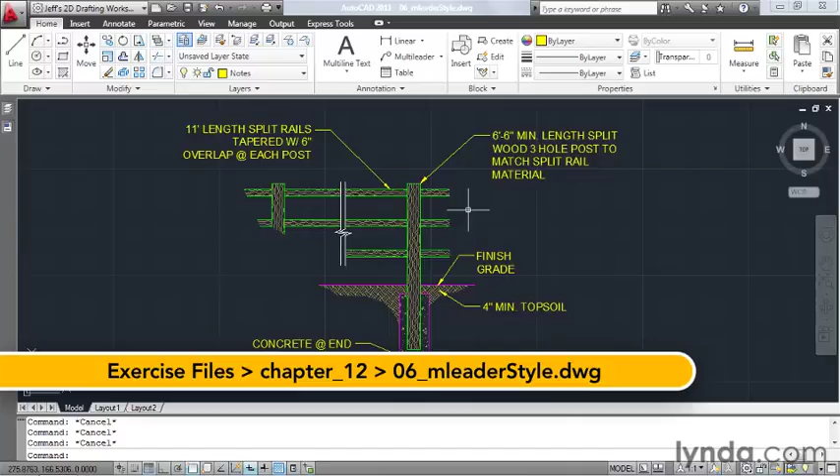You were probably wondering, and you were right, the appearance of your multileaders is also controlled by a style. In this lesson, we're going to take a look at multileader styles. On my screen, I have a detailed drawing, and this drawing contains several multileaders. Let me mention that all of the leaders in this drawing were created using the default standard multileader style.

Let's take a look. I'm going to click to open up the annotation panel, and right here, I can see the name of the current multileader style. It's called standard. All drawings start with a standard multileader style. Just like text and dimensions, you need to have at least one style to create multileaders. If I click this flyout, we can see that standard is the only style in this drawing.

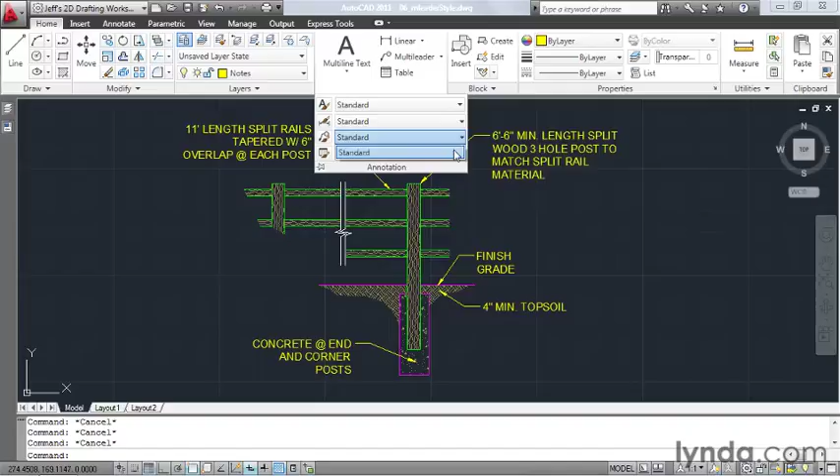If I'd like to make changes to this style or create a new multileader style, I'll click the multileader style icon. This brings up the multileader style manager. And notice this looks very similar to the dimension style manager. In fact, it works the exact same way. Right here, I can see the name of the current style. On the left side, I can see a listing of all of the multileader styles that have been defined in this drawing.

Using these buttons on the right, I can set a style current, I can create a new style, I can modify an existing style, and I can delete a style. Notice that the delete button is grayed out right now. That's because I only have one multileader style in my drawing. Now, since I have already created several multileaders in this file, I'm not going to create a new style right now. Instead, we'll make changes to the existing one.

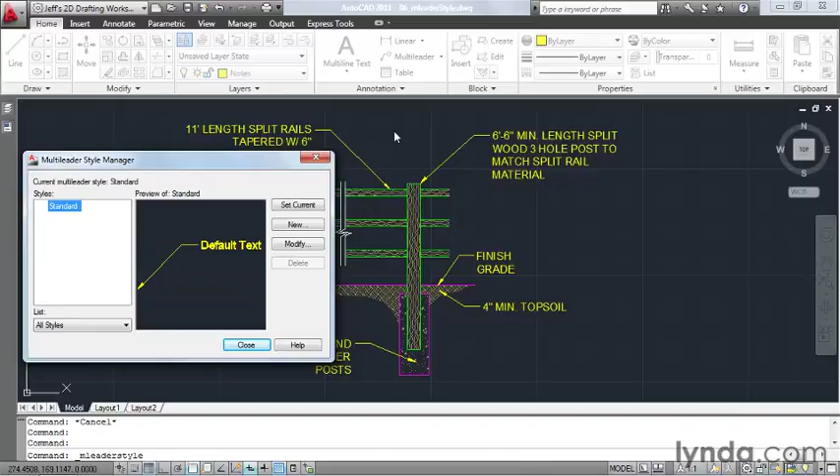If you did want to create a new style, you could click this new button, and right here is where you could give the style a name. And just like with the dimension style, your new multileader style will start using the settings from an existing style. I'm going to click Modify, and notice that multileader styles have far fewer settings than a dimension style. That's because there isn't as much to multileaders. Essentially, we have settings for the leader format, leader structure, and content.

Now, we're not going to be going through all of the settings in this dialog box. One great place you can go to learn about multileader settings is this hyperlink right down here. If you click this hyperlink, AutoCAD will give you more information about the concept of multileaders and their styles. For information about specific settings, simply hover over it, and AutoCAD will give you a more detailed description.

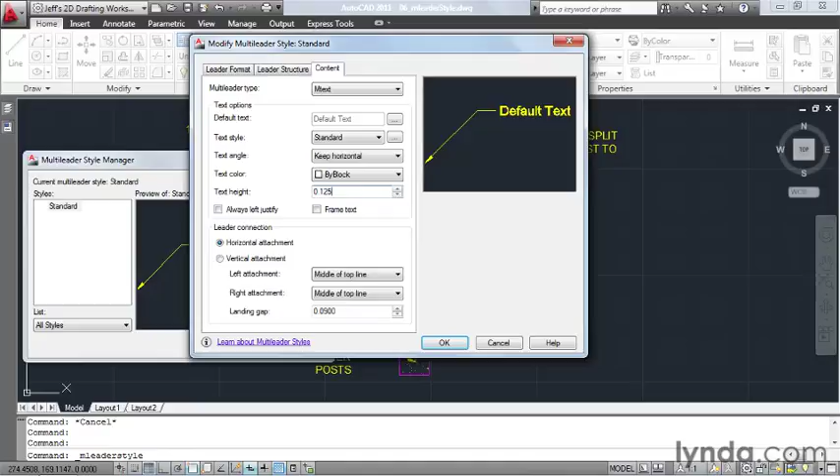And don't forget about this preview. This is a nice visual cue of what the style will look like. If you have questions about a style setting, change it and see how it affects the preview. I'm going to start by changing the text height. Currently, this is 0.18. I'm going to make this a little smaller. I'll make it 0.125. Then I'll press OK, and I'll click Close. And notice how all of my multileaders are conforming to the new settings.

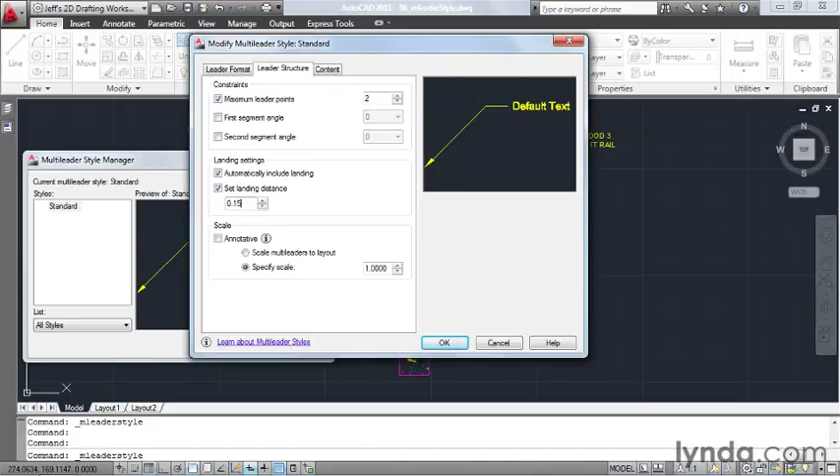I'd like to make one more change. Let's go back to the Multileader Style Manager. I'll click Modify, and I'm going to click on the Leader Structure tab, and I'd like to adjust the landing distance. Right now, this is set to 0.36. This guy is controlling the length of this line. I'm going to highlight this value, and I'll change it to 0.15. I'll press Enter, then I'll click OK, and Close.

As you can see, multileaders hold to the same principle as text and dimensions. Their appearance is controlled by a style, which standardizes their look and makes it easy to make global changes.